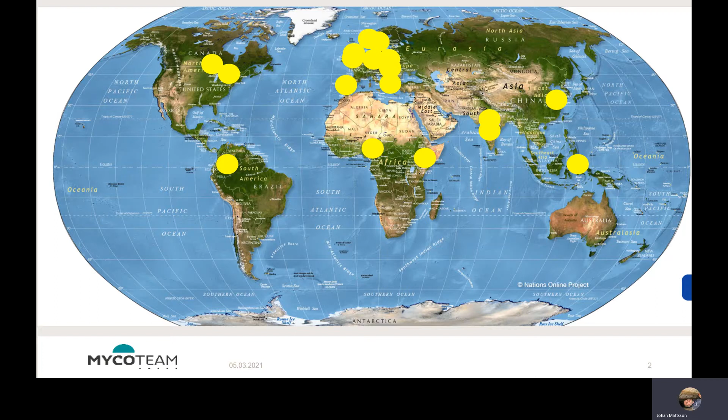This is a map of where I assume you are sitting right now and listening to this. So as you can see, it's a good distribution all around the world, and by that reason you also have very different experience of what can be the problem with biodeterioration. But still, hopefully you learn through this presentation that you also have a lot in common about these aspects, because at the general level, it's very much similar issues, no matter if you're sitting in Canada or Colombia or Philippines or in Finland. So this is typically something you have to understand at a general level in order to be able to manage it at the specific level afterwards.

I work in the company here in Oslo, and we are all the time working with biodeterioration in different aspects. We started this company in '86, so we've been working for 35 years, and we are almost 40 persons, and most of us are biologists. So we have this approach of looking into different problems with a biological view. And that can be very useful, because otherwise, if it's civil engineers or architects, they have a lot of understanding, but not about these specific issues that fungi and insects are depending on.

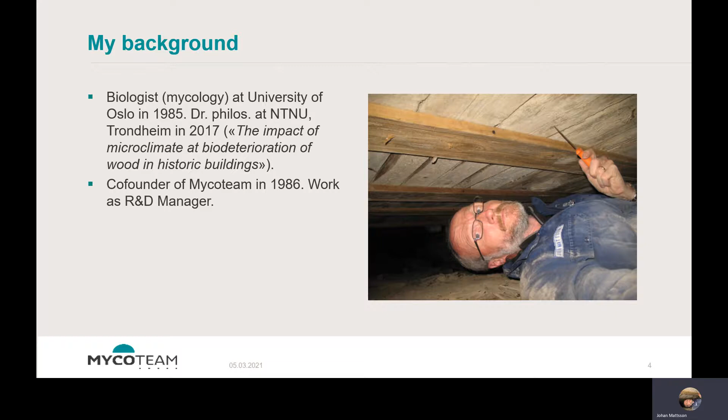And also I have a very practical approach to issues. I'm very much out in buildings looking for reasons why damages have occurred, and the solutions for how to handle a possible damage. But also, of course, it's not only old buildings. We can find biodeterioration problems in all kinds of buildings, in new concrete constructions, and of course in other constructions as well. So I've been offshore sometimes in steel constructions, looking not for fungal deterioration, but mold problems. So this is a universal problem you can find in all kinds of situations, and of course it's more interesting to work with old buildings.

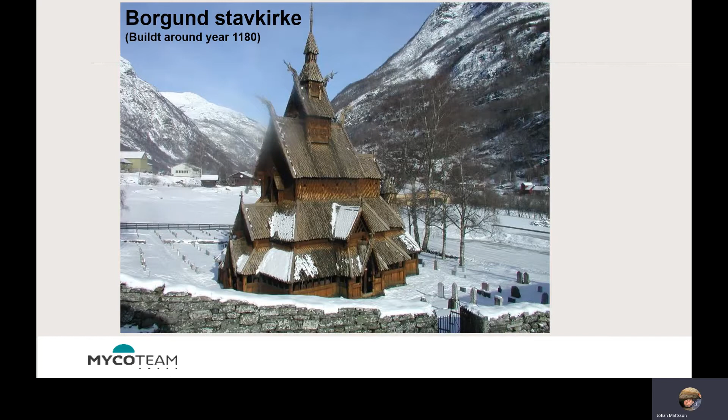At least I have a special interest in old buildings, and of course, if they're still standing there, there has been a lot of exposure and a lot of damages occurring all the time. And the building has been standing there. So reading the building, both where you find damages, where you find absence of damages, and where you find repaired materials, is a lot of important information for you to understand how this building is working, where the weak points are, and what can be done in order to avoid the damages.

But of course, the wood in the forest in nature is supposed to decay sooner or later, because it's a natural circulation of carbon and other substances. So of course it's supposed to be decayed sooner or later, but in buildings we would really like it to be later than sooner.

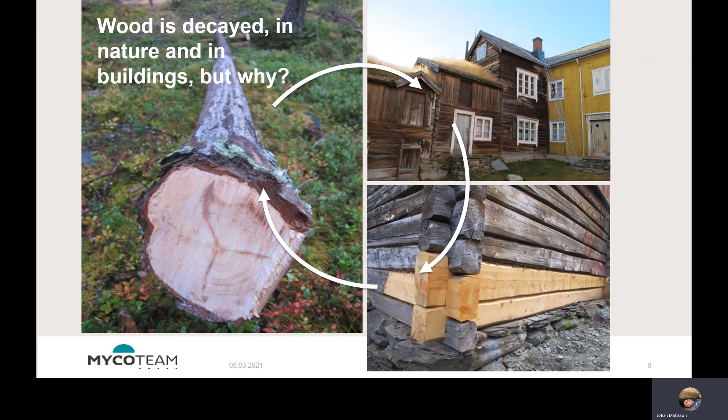So we can see and expect that this will happen. But of course the question is, how can we prolong the service life, and what can be done if we see that it's a problem with some deterioration? And to this, the main answer is knowledge. We have to understand what biodeterioration is, what the causes for biodeterioration are, and what can be done for avoiding that.

The problem is that there are a lot of different species that cause different kinds of damage. So it can be complicated if you go too much into detail. But for many insects and of course all fungi, you can generalize the issue and say that dry wood will not deteriorate. The problem occurs for pine and spruce, which are the main wooden materials in Scandinavian countries, typically when you have a moisture content above 20%. Then there's a possibility for fungal activity, and then we can have a problem.

But of course, keeping the wood dry doesn't have to be very complicated. It can be done just by good constructions, by some layers that keep the water away from the main construction, and also surface treatment, for instance, can keep the wood dry, and for that reason many of the materials are safe.

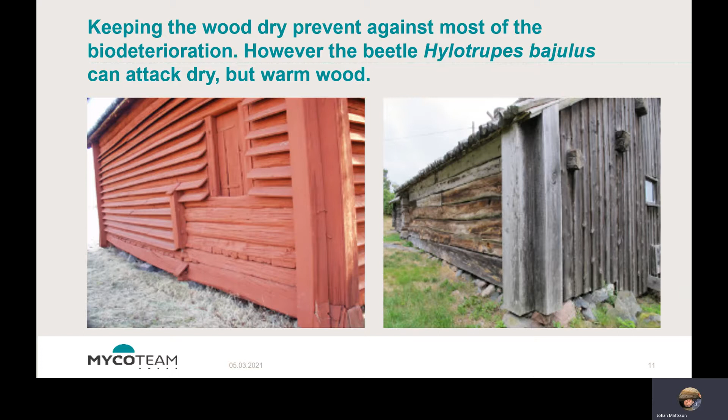But of course there are some species, like in Scandinavia we have this house longhorn beetle, Hylotrupes bajulus, that can to some extent also develop in quite dry materials, even though this is not the favorable spot for the insect. They can handle the dry conditions quite well.

But just looking out in nature, we can see the pattern of deterioration very clearly. If you see a trunk or some other materials, you can see very soon where the moisture content is more favorable and where the biological activity is occurring. So you can see that typically the sapwood is the most attractive for biological activity, in the meaning of deterioration.

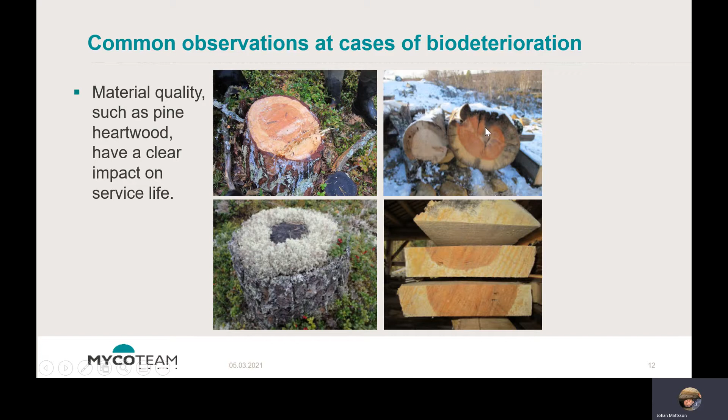You can see the same pattern in logs that have been exposed for a long period. You see that the decay is occurring in the sapwood, not in the heartwood. So we can understand that the material quality has some importance in order to avoid biodeterioration.

We have to understand the main factors causing the possibility for biodeterioration. And in order not to make it too complicated, I usually simplify it and say that we need just a few factors. There are 4 main factors that are the crucial issue in whether there's going to be any biodeterioration or not.

Of course, fungi and insects, as well as we, need some nutrition in order to survive. These specific species are really experts in digesting and deteriorating cellulose in the wood. And of course, since cellulose is a major part of the wood, the consequences can be huge if they really deteriorate that part of the wood.

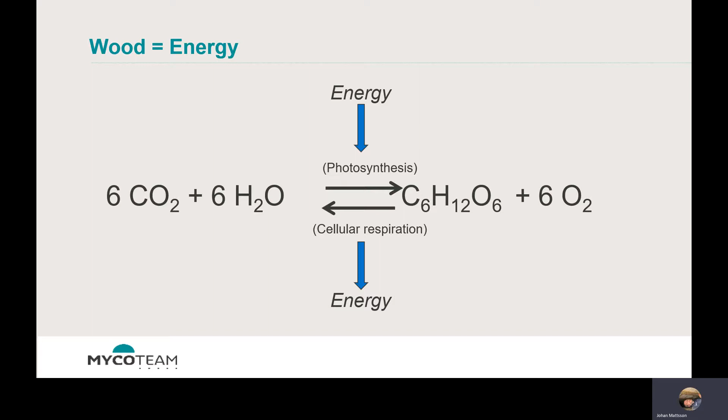with the wood. Then the biodeterioration can be caused by three different processes. One is the external enzymatic activity, and that's typically fungi. Because they don't have any intestines, they don't have any mouth, they have to dilute the enzymes out in the surrounding area, and the enzymes deteriorate the wood and give nutrition to the fungi. And in order to handle this, they need enough water in the wooden cells for this extracellular enzymatic activity.

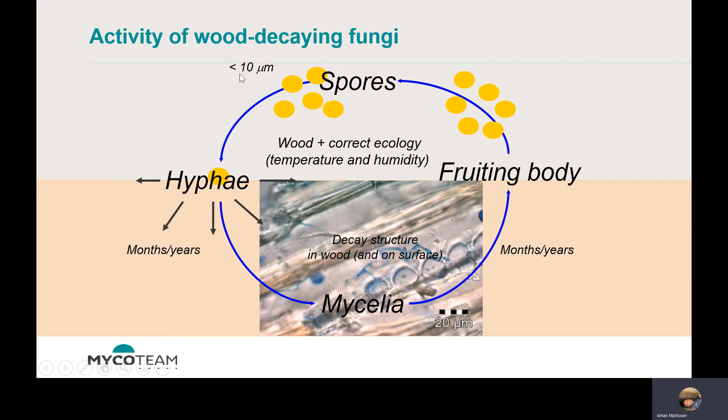So deterioration occurs in each single wooden cell. And in order to have this activity, there has to be enough water in these wooden cells. And then the fungi can eventually cause serious decay of the wood, and by that also get enough nutrition for growing and producing new fruiting bodies and spores and then spread around. So they have a life cycle that is depending on access to wood and water.

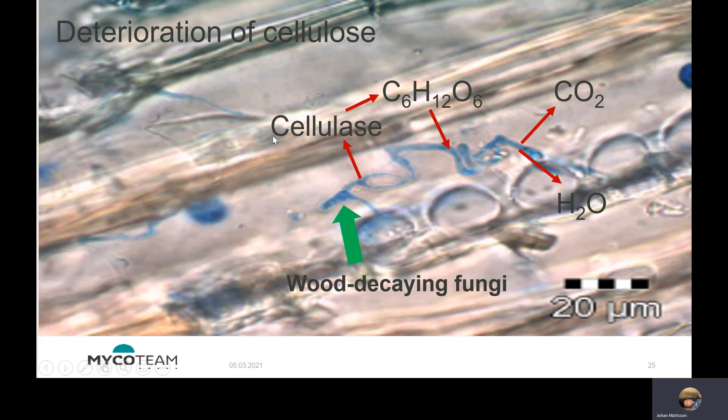And what's really happening is, here we have dyed the fungal structure blue in the microscope, but from these fungal strands, the enzymes that are breaking down the cellulose are released in this aquatic environment. And then the fungi can get the nutrition from the deterioration, and the process is releasing carbon dioxide and water. But if it's too dry in this wooden cell, the enzymes wouldn't function, and then the activity of fungi stops, and there will be no further development.

But typically the best moisture conditions are inside the wooden materials. On the surface, the wind and surrounding air are drying out the surface. So the fungi have good conditions for development inside the material, but not on the surface. So it's typically inside the material we find this decayed wood, which normally has a brown color and this cubical cracking pattern. So if you're looking for fungal attacked wood, you can't rely very much on how the surface looks. You have to look into the internal part of the wood.

And the problem with this is that this requires more or less a destructive method for investigation. But of course, if it's heavily decayed, the harm you do with your knife is not a problem because it's so much decayed from before. It might be that you see some fungal activity on the surface of the wooden materials, but that is very rare because, as I said, the surface is normally so dry, so you can't have any fungal activity there.

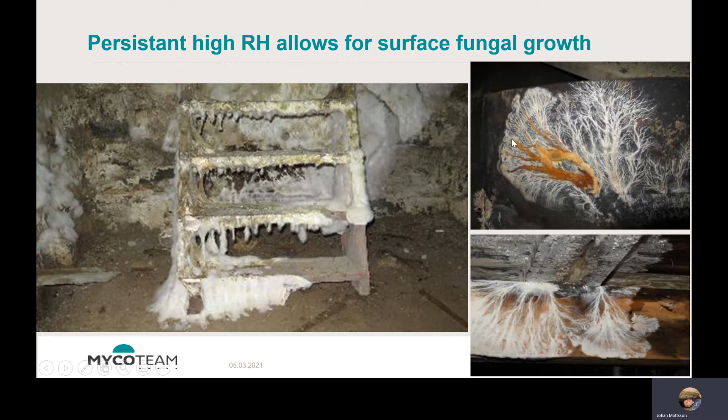But in environments where there is permanent high relative humidity, the fungi manage to grow on the surfaces and spread around much better and much faster on the surface than in the wooden cells. And that is typical for some special fungi like dry rot fungus, Serpula lacrymans, and the different Antrodia species that can manage to grow on the surface at very damp conditions.

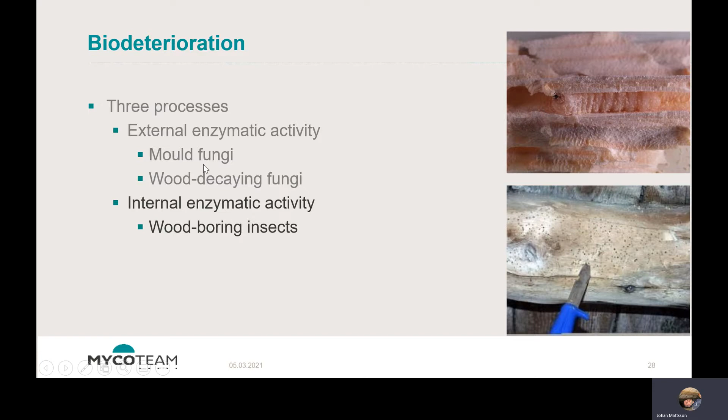But as I mentioned, there are other processes causing biodeterioration, and that is what is caused by the insects when they're eating the wooden cells. They digest it in their intestines, and then they have this internal enzymatic activity. That is caused by the insects which have the larva stage in the wood, and it's the larva that eats the wood, causing the damages, not the adult beetles, because the adult beetles just live for a few weeks and don't eat at all, so they don't do any harm to wood, but they produce new eggs that give larvae that can cause further development of damages.

So typically the insect activity is occurring inside the material, and the only sign of any activity often is the emergence flight hole you see on the surface. And then the insect has already left the wood for copulating and producing more eggs. So it's larvae inside the wood that are eating small fragments of wood, getting them into the intestines, and then it's a deterioration by both cellulase and some microorganisms, and then it's the same result: release of energy and release of carbon dioxide and water.

And the remaining part of the wood that hasn't been digested is this typical bore dust, which is the excrement from the larva. And you can see that normally the deteriorated wood is full of bore dust when the insects are eating their way into the fresh wood.

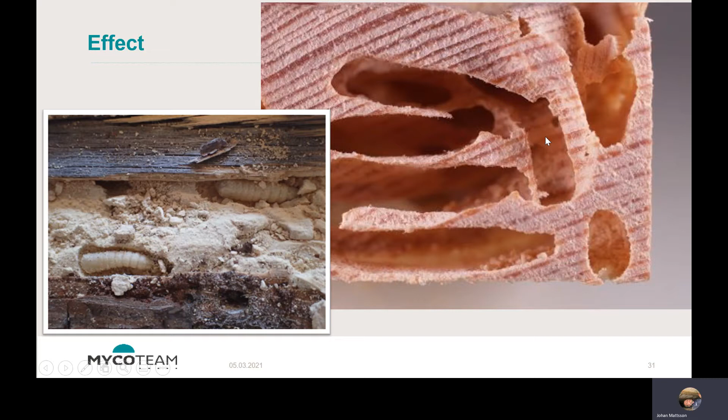And the consequence of the activity is, of course, more or less extensively deteriorated wood, and the strength has been strongly reduced. There is a third option in biodeterioration, and that is when there's no digestion at all, but some other activity causing the damage.

It might be a woodpecker making holes for a nest, or searching for food, or just making noise to scare away rivals. Or it might be ants who are using wood for a nest, and then they have to carve out the material in order to have a place to live. You can find that in nature as well as in buildings. And there are some rodents that are just using their teeth to get through wooden materials.

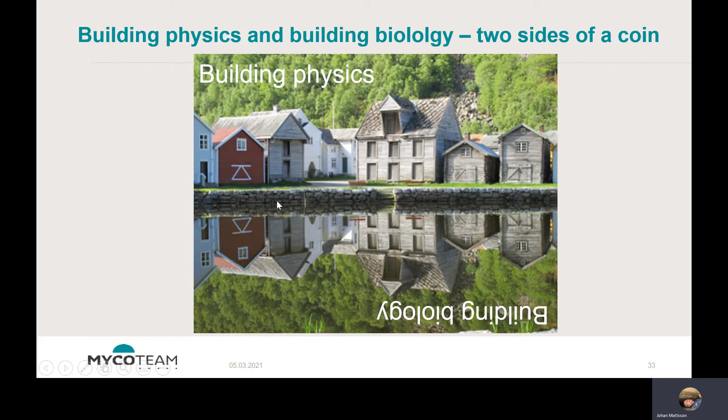You don't have to be a biologist to understand biodeterioration, but of course it's a very good advantage. The reason for biological activity is suitable building physics in the building, and on the other hand you can turn it around and say that if you have suitable building physics, you can understand what kind of biology will establish sooner or later. So these are two sides of the same coin, building physics and building biology.

And biodeterioration is a universal problem. I have been traveling around quite a lot, looking at damages in different countries. And even though there might be special species, special wooden materials, special constructions, and special climatic conditions, at the general level it's the same reasons for the biodeterioration. So it doesn't have to be very complicated to understand this. If you have a general understanding, you can apply that to a different kind of environment and still get a quite useful answer.

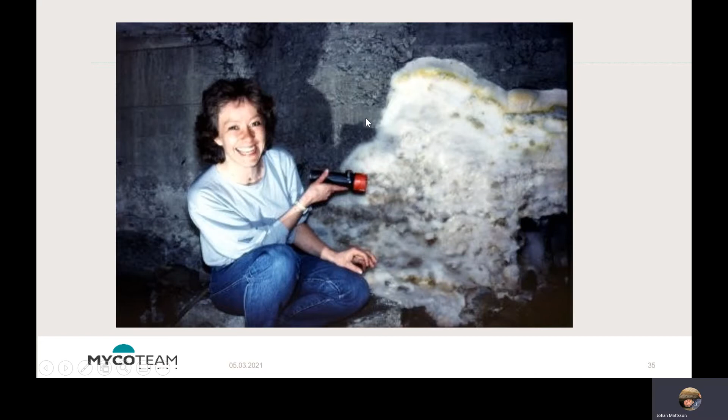But of course, if you have the interest and the fascination for biology, then it helps, even though it might be quite a tragic occasion with a lot of house dry rot fungus in the house. So interest and curiosity are a very good help for understanding the damages.

And then it doesn't matter if the house is in Norway or in Japan, as in this case in Sapporo. We have the same building physics in the crawl space, and the same kind of excess of water, temperature, cellulose, and then of course the Serpula lacrymans species, the fungus, doesn't care if it's in Norway or in Japan. It's quite happy digesting the wood anyhow.

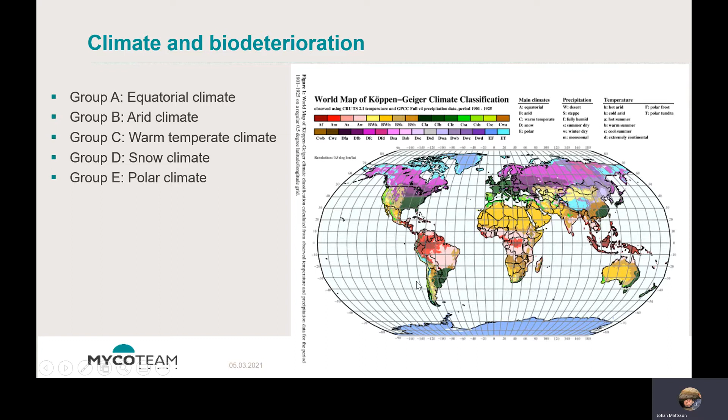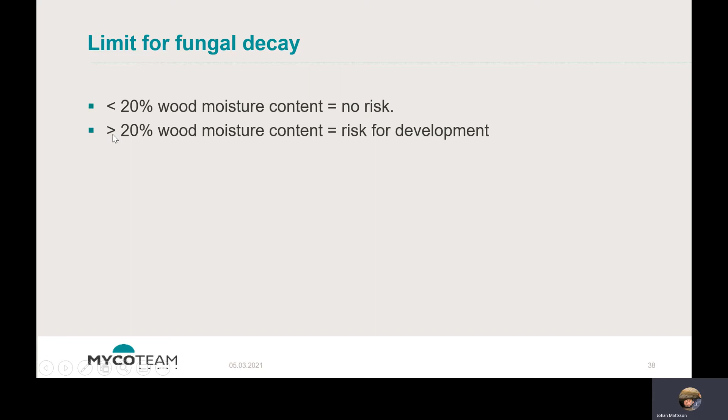So if we can take one physical and especially mental step backwards, we can understand that even though there are quite different climatic conditions all over the world, there are some factors that don't change. Typically, if it's below 20% moisture content in spruce and pine, there is no risk for fungal activity. But the higher the moisture level above this 20%, the more increasing the risk for fungal activity.

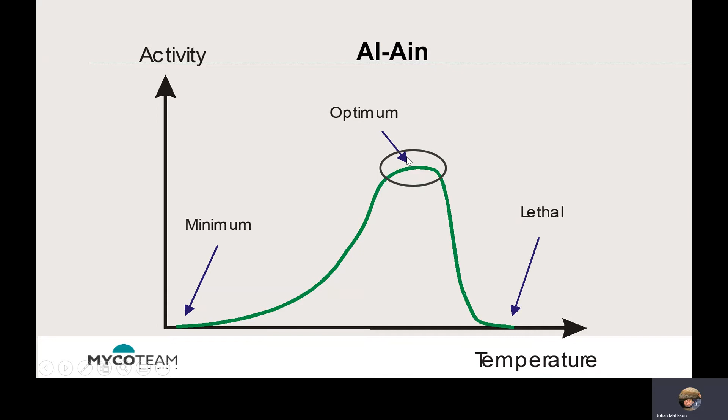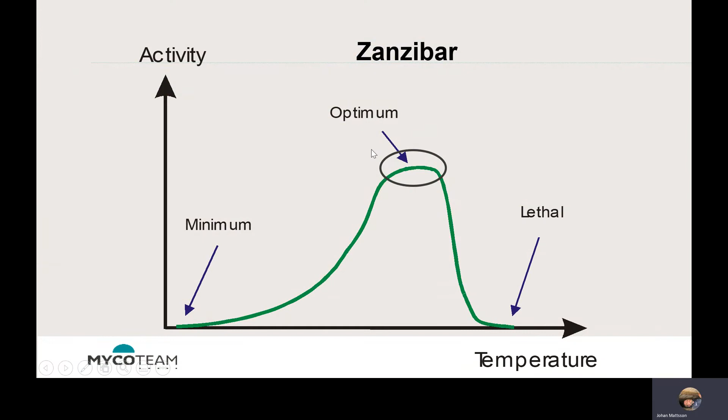But it's interesting to see that the reason the doors on both sides of the street get wet is that the water comes off the roof, splashes down on the street and splashes up again on the opposite side of the street. And of course, if you could avoid this, the wood would stay quite dry, and then there wouldn't be any problem with fungal attacks. And when I was there, we found an old postcard.

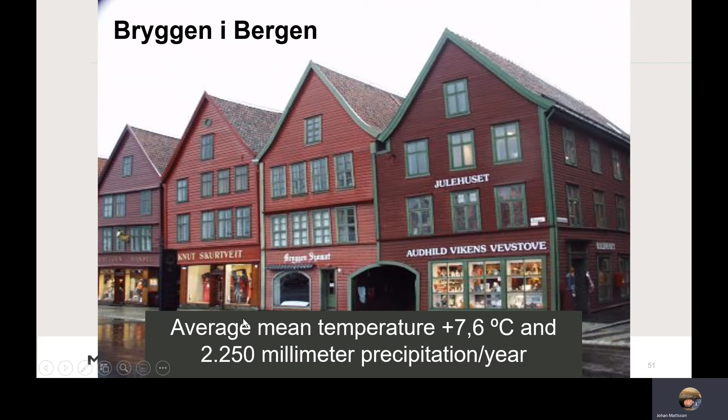If you go to Norway, we can see that it's not the same temperature. It's quite a more cold climate, but still it's a lot of rain falling down every year. Here in Bergen, this is the World Heritage Site of Bryggen in Bergen, and this is buildings from early 1700. And with that kind of moisture exposure, you can expect it to be very fragile for biofungal deterioration. So even though the temperature is not so perfect, it would be a high risk.

But the constructive elements are made for keeping the facades, the constructions so dry, so there wouldn't be any suitable conditions for fungal attack. It gets a bit wet when it's raining, but it's drying out very fast, and then it's not a problem in most of the surfaces and materials.

And of course, if some water drain pipes are destroyed, and you get a lot of water on the wall, you can have extensive damages locally where the timber is wet due to this failure. But at the same time, the other wooden materials are standing quite well because they are not exposed to this extreme water intrusion.

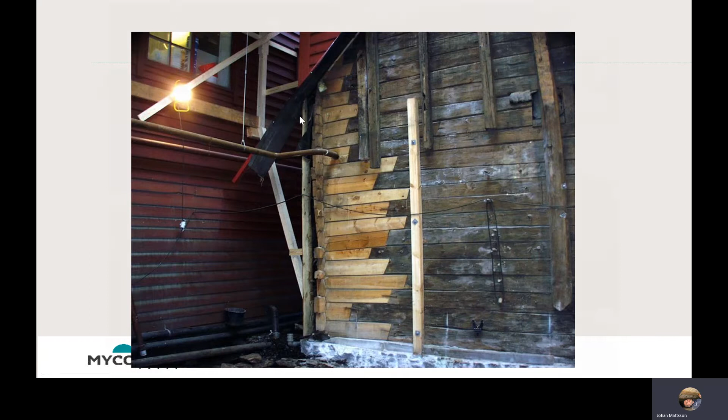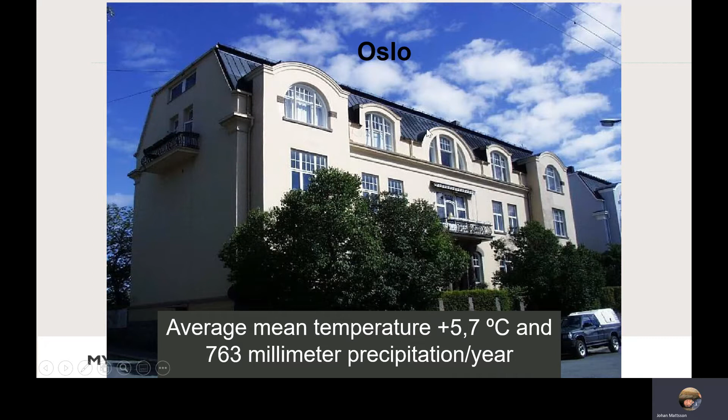In Oslo, we have a bit less precipitation every year, but also a bit colder climate. And then we can find typically the damages are occurring where we have leakage into constructions. And as you remember this map, obviously we have a lot of biodeterioration in Oslo as well, even though it's a cold climate and not so much precipitation.

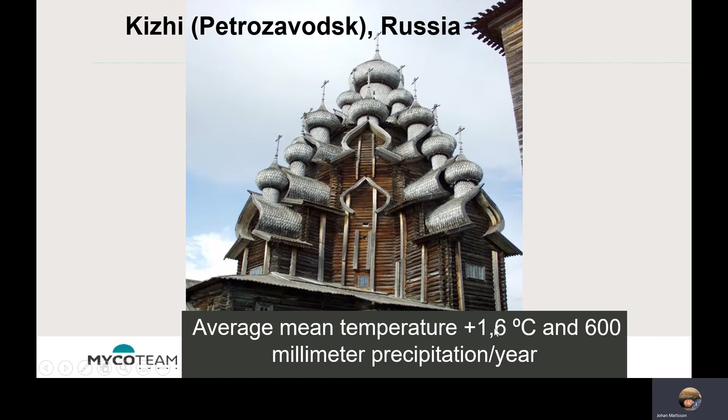Another example is in Russia, at Kizhi. And here it's even colder. The average mean temperature is just above 0 degrees Celsius, and it's not so much rain either. So then you can expect it to be quite unfavorable for fungi to grow there. But still, there are some materials that are exposed to temperature, exposed to water, and then of course it can start to deteriorate.

But then again, it's just part of the construction that gets wet and will get the deterioration. So it's not necessarily so extensive damages, but as long as you get water on the surfaces, it's a risk if the water gets into the logs and has a long, slow drying out process.

And typically there, the church had originally a timber construction, and then they installed a cladding, and the cladding was protecting the timber structure. So the fungal attack that had started the first time was halted by the cladding. But when the cladding was removed, the deterioration could continue because then it got more water on the timber construction again.

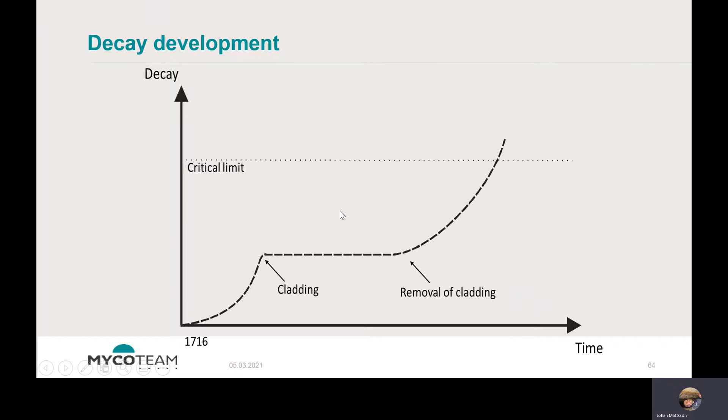The exposed timber up in the air is drying out thanks to the wind, but the lower part of the buildings might have a problem due to the snow and rain that is on the surface and gathered together in local areas.

And then of course you have a problem with biodeterioration, even though the climate in general is very harsh for fungi. The most extreme illustration of this is from Svalbard, Spitsbergen, which is about the most extreme you can think about. It's an average temperature of -6 degrees Celsius, and it's a really low amount of precipitation. So this is more or less a polar desert.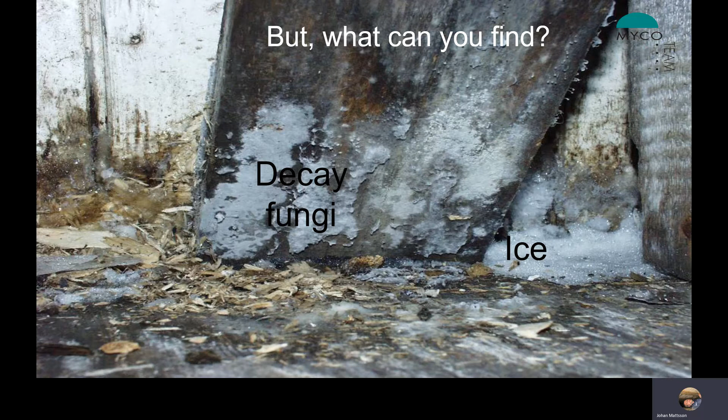There are some periods when the temperature is not so low anyhow, so the fungi can grow. This fungus is typically the one we find very much at Svalbard. It's Leucogyrophana mollis, so it typically has quite favorable conditions, even though it's cold in a general sense.

But if you start mapping the temperature in this hunting cabin, with the air temperature at the time of 1.4 degrees Celsius, you can see that different parts of the wall had a significantly higher temperature due to the sun radiation. So it's not correct to say that this hunting cabin had a temperature of 1.4 degrees Celsius. It depends on where you're looking for the temperature.

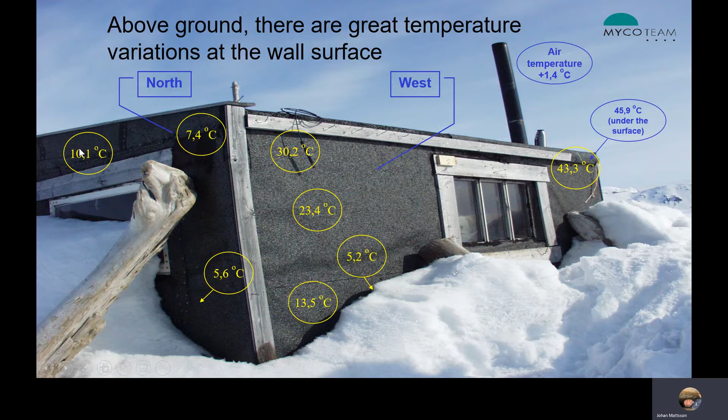And as a matter of fact, in that area, it was so warm that it was too warm for any fungal activity, because it's a dark surface and the sun radiation gets the temperature very high. And it's fascinating to see that at Svalbard, we measured higher temperature than the average temperature at Zanzibar.

So you can't only rely on looking at the map or a general impression of what the situation is. You have to measure it and examine it in order to really be sure what is the correct situation. So in this roof board, I can go back, this one, you can see that inside this material it's more or less a tropical microclimate. As long as it gets wet, it's fantastic for fungi to grow there.

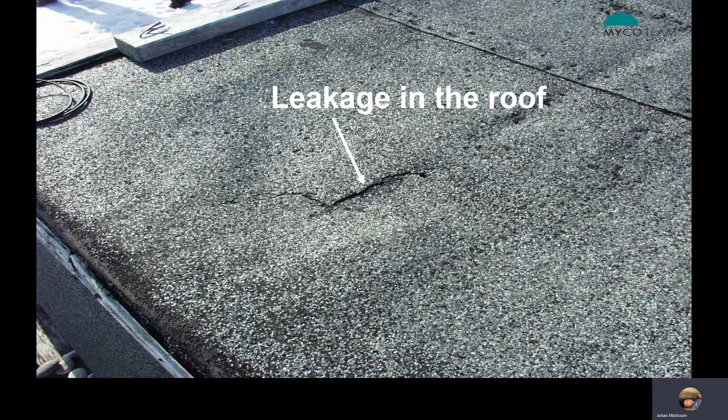And this fungus we found here is Gloeophyllum sepiarium. It likes warm, sun-exposed constructions in Scandinavian countries. So this really shows that you have to look into the microclimate in order to understand the risk for biodeterioration. And even though there's very little precipitation, if there's a leakage somewhere, a lot of water can get into one spot, and then you can have extensive deterioration in those materials.

But of course, people there are not so concerned about decay fungi, because they are more afraid of other organisms that might be more dangerous in general.

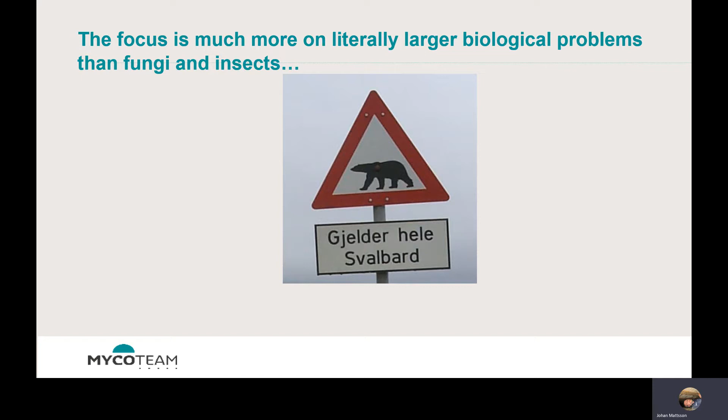At Zanzibar, the timber is very resistant, but the climate might also be very harsh, very humid, damp and warm. So we can see that many of those damages I've seen in Bergen, in Røros, Svalbard, Russia, Zanzibar, and other places happen within 50 to 100 years if it's outdoor exposed materials, because the microclimate might be much more similar than you first expect it to be.

But then, of course, some damages don't really depend on the climate. If you have a leakage in the roof, if you have extensive water intrusion due to some constructive error, then it will be a problem no matter what kind of climate you have.

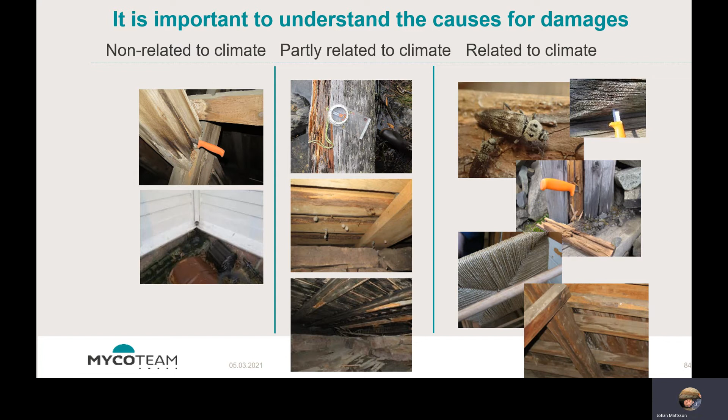And sometimes you can see the construction has such stable conditions that the climate doesn't really matter so much, while other damages really depend on the climate, on the temperature for insects, for instance. There is no insect problem at Svalbard because it's not warm enough for insects to survive there, but the fungi manage.

So we have to understand what are the different reasons for deterioration. And climate change is a very big issue in many countries. Of course, it really should be. But when people started using modeling methods to predict what will be the future decay problem on outdoor exposed wood, then I have to say that this is a completely wrong way to analyze things, because it's not correct.

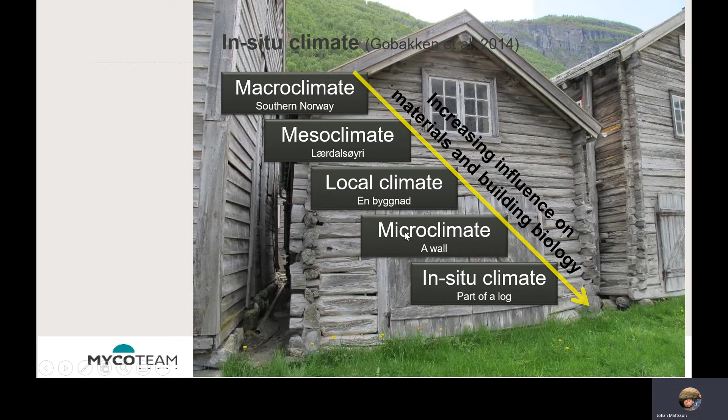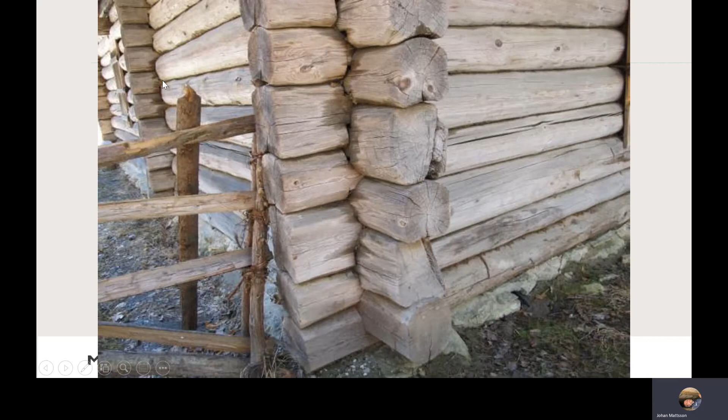You can see this is from Estonia, a museum building that was moved there 30 years ago. And you can see in the springtime it's a quite dry log wall. But if you look in detail, you can see that some areas are a bit wet due to rain and dripping from the roof. And we can go even closer. We can see that this is the area which is really wet.

And the question is, how fast does it dry out again? If it's wet for weeks, months, then there's a risk of deterioration of the wood. So even though the building might look quite dry, there can be local areas that are critical for biodeterioration.

Then, of course, it's not only fungi. It might be mold. It might be other plants that grow and cause discoloration, and there might be different reasons why there can be decay of wood materials, even though they're not necessarily eating it. So different reasons can cause different kinds of damage, but the main problem is biodeterioration. And that is something that's predictable.

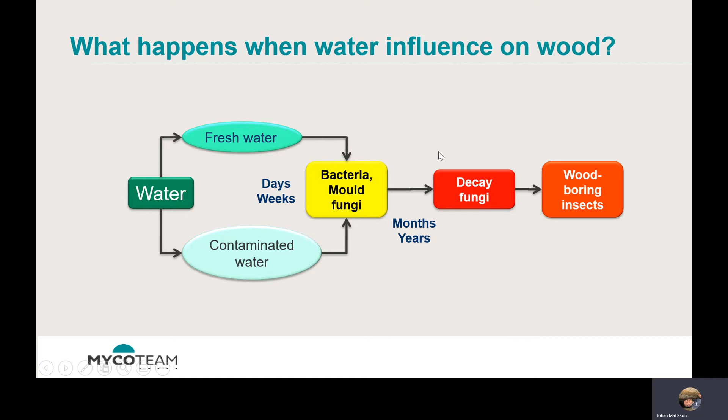You know, if you have wet timber, there will be some mold within weeks, some fungal attacks within months or years, and also wood-boring insects within years. So this is very predictable, and that's a very good advantage when we try to avoid problems in buildings. You saw this earlier. On surfaces there's not very much damage to find, but inside the material we have much more extensive damage developing.

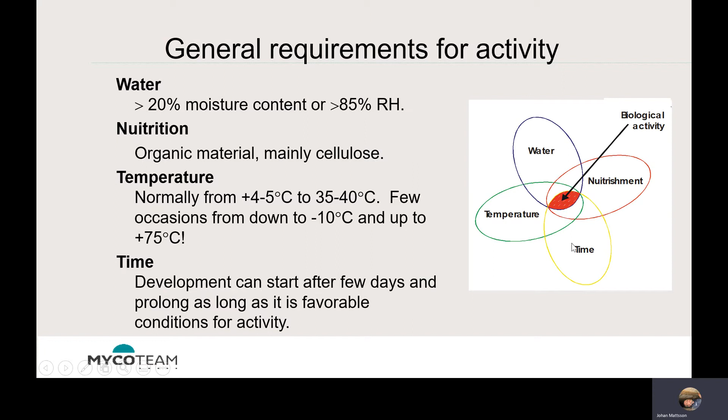And the reason is, just to repeat these four factors: if it's wet wood at a suitable temperature, it's just a matter of time before it has some kind of biodeterioration. So this is the figure you have to remember. And if you understand this simplified version of the conditions, then you can solve most of the problems in your own country.

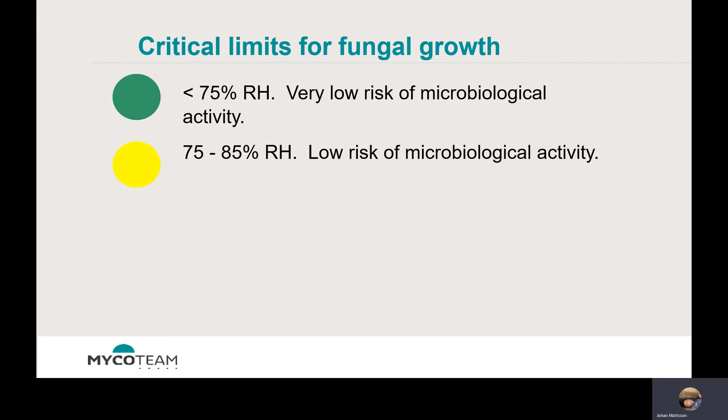If we're talking about mold, then it can occur on many different surfaces, and it can grow quite fast, as I said, within weeks. There are a lot of different species, but most of them require above 85% relative humidity in order to grow. And the higher the humidity is, the better the conditions for the fungi. So if it's completely wet, you can find mold damage perhaps within weeks. So the critical issue is to keep the wood dry.

So the gradient is very small, just within a few millimeters, and that is a critical thing to understand when you are looking for moisture problems and measuring the room air relative humidity, because it's very easy to measure at the wrong spot and then you get the wrong answer.

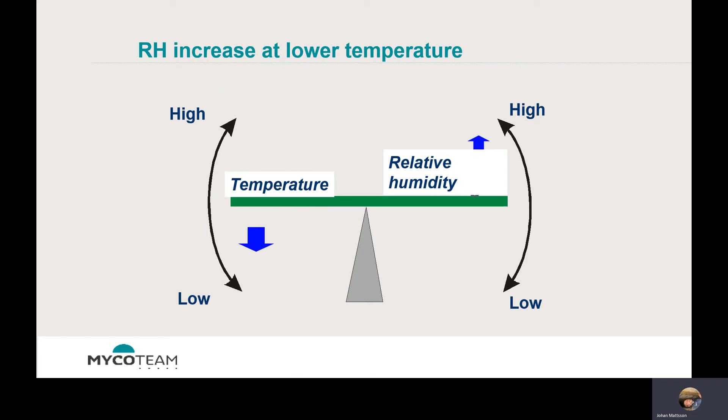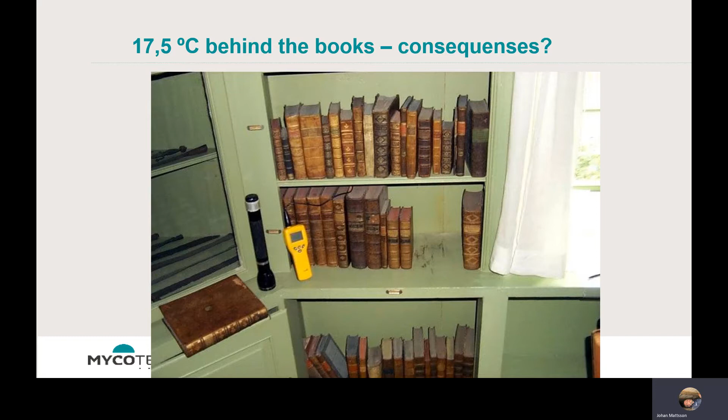The practical issue of that is that you can see in this case a museum library with quite poor ventilation. In the room air, it was 75% relative humidity that summer with 20 degrees Celsius. And on a north-faced wall, behind this bookshelf, we measured 2.5 degrees Celsius lower temperature. And what would be the consequences of that? If you remember, I said that if you change temperature 5 degrees Celsius, the relative humidity would change 20%. In this case, we changed it from 20 to 17.5 degrees behind the books. Then the relative humidity would rise 10%, up to 85%.

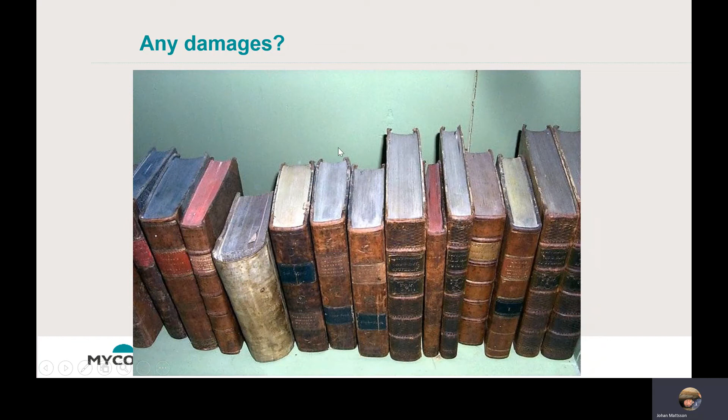Then the question is, is that a problem? Well, you can look on the surface area to a room, and it's not a problem at all. But behind the books, where it's more stable, a bit more damp conditions, you can see, not necessarily very easily, but if you look more into detail on those books, you can see that there were some visible mold damages on the surfaces.

So a good advice to look for mold damages is to use a parallel light beam on the surface. Then you get a relief of the mold that gives a very clear vision of the established damage, like here. So be active with a flashlight or use flash on the camera when you take pictures in some different angles, and then you might see the damages very clearly, even though it's not so visible for the naked eye.

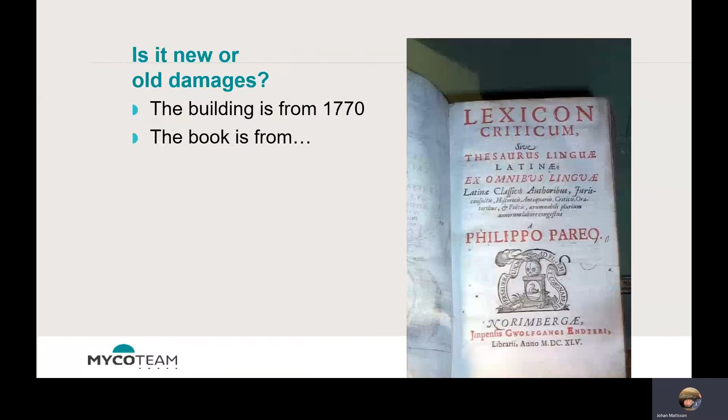Then, of course, if you have books with mold damages in a building, you have to start asking, is this a new or an old damage? The building was from 1770, and the book, as you can see down here, is from 1645. So in this case, the book was older than the building. So potentially the mold damage could have been brought into the building. But if you go back, you can see that this is very fresh, new grown mold. So at least I can see that. So then you can understand this is something that had happened that summer.

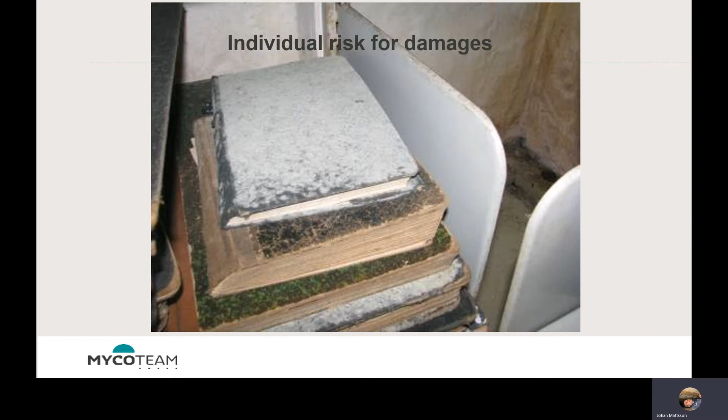But as always with timber, with other materials, and people as well, one person can get a cold and another can stay healthy. You have to understand that different, more or less similar materials can have very different reactions to an exposure for mold, for instance. You can see this book on the top is heavily infested by mold, and the next one is not at all, but then again, one book is heavily infested with mold. So if you're looking for damages, you have to make a representative selection of surfaces you're looking at in order to find if it's a problem or not. And remember this.

Sometimes it can be very strange damages, like this case. Here you can see that this wooden spoon in an unheated museum building in Norway had extensive mold growth on one part of the spoon, but not on the other part. And at the same time, you can see that the floor, the wooden table, didn't have any mold growth at all either. So of course the temperature, the moisture, and the time exposure is the same. So the only different thing is the accessible nutrition.

And as you can see here, the wood is not enough for the mold growth, but this spoon has never been washed properly after it was used last time. So this part has been used in some food, porridge or something like that. So the remains of the old food substances is enough for the mold growth to occur. So in one way, it's not necessary to change the temperature, the relative humidity, or that kind of physical aspects, but in order to remove the mold, you have to wash the spoon.

But of course, then you remove some of the old food nutrition substances that could be interesting for scientists in the future. So don't uncritically remove all old dust, old surface treatment or whatever on surfaces, because they might be a source for future information.

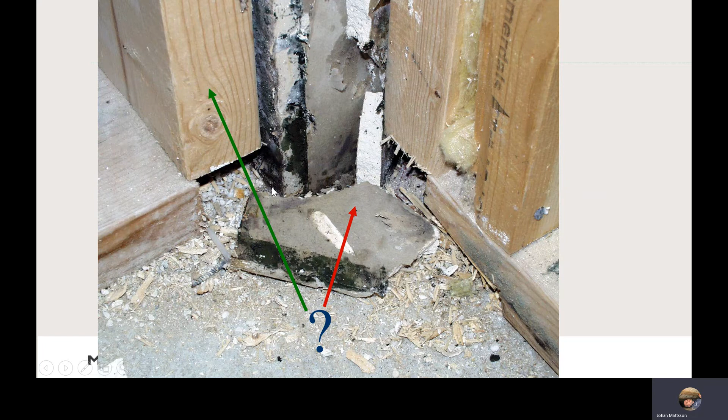So using ordinary traditional spruce materials has proven to be okay, but these modern cheap wooden particle boards are completely hopeless in that exposure. And we see those differences between different materials in modern buildings and water damages. You can see the wood itself, the spruce, has no sign of mold growth at all, but these modern gypsum boards, plasterboard, have extensive mold growth on the paper lining on the surface. So we have to understand that material quality has a very large impact on the risk for biodeterioration.

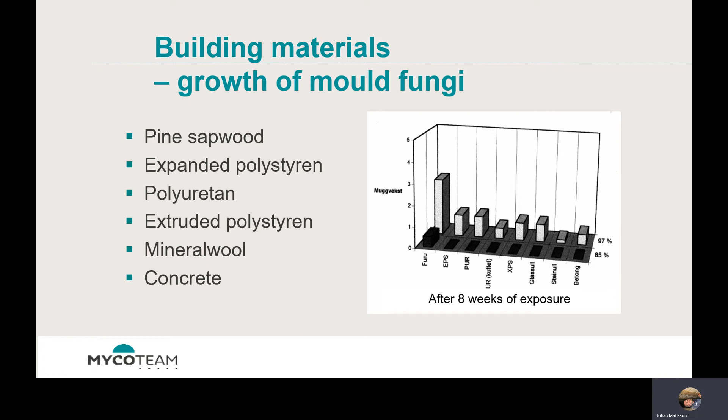And well, this is modern materials, but we did a test of growing mold on modern insulation materials. And you can see at 85% relative humidity, there wasn't any growth at all, except for the control material, pine. But if we raise the relative humidity to 97%, we got, as a matter of fact, mold growth on concrete, on rock wool, on glass fiber wool, and different extruded polystyrene and polyurethane foam. So mold can grow on any surface if it's getting wet enough for long enough time.

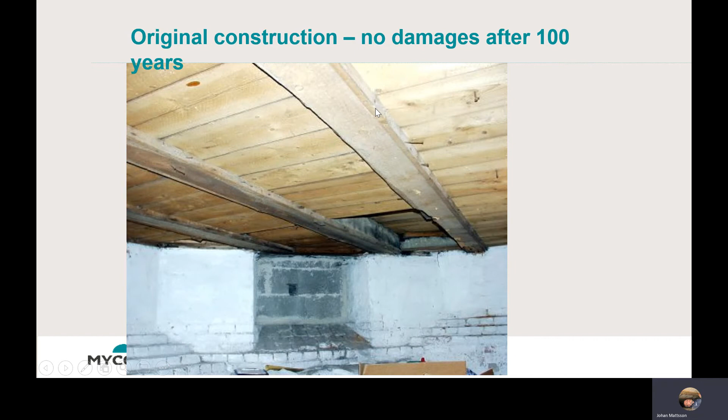And typically, you can see that this damp basement has worked quite well for 100 years, and then by a fire regulation, the floor was secured by gypsum board in order to get fireproofing. But then in this exposure, within 1 year, the gypsum board was heavily infested by mold growth.

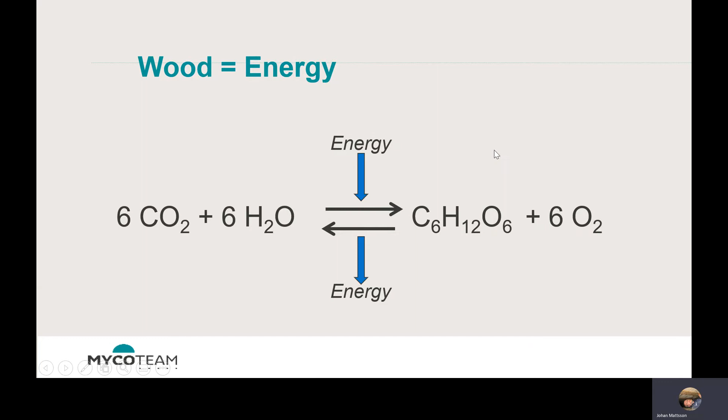So we have to understand: is there possibility for the different organisms to deteriorate cellulose? They will do that. And we have to understand what is the risk for that happening in different material quality, different exposure, different conditions. Because if the fungi get the possibility to deteriorate cellulose and hemicellulose, there is very little remaining material in the wood. Only the brownish lignin remains, and then the kind of decay is called brown rot decay. It's caused by very many different kinds of species.

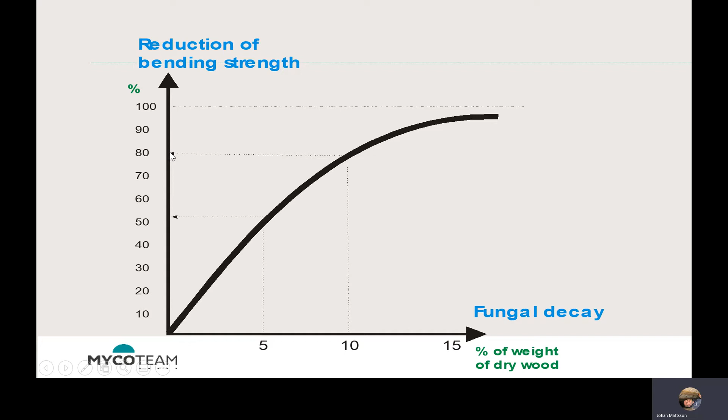But then the challenge is to find where the damage is, because we can't find it on the surface. We have to go into detail and see where the risk is for any activity, both by normal fungi and more rare fungi, because this is the ruling reason for the damages.

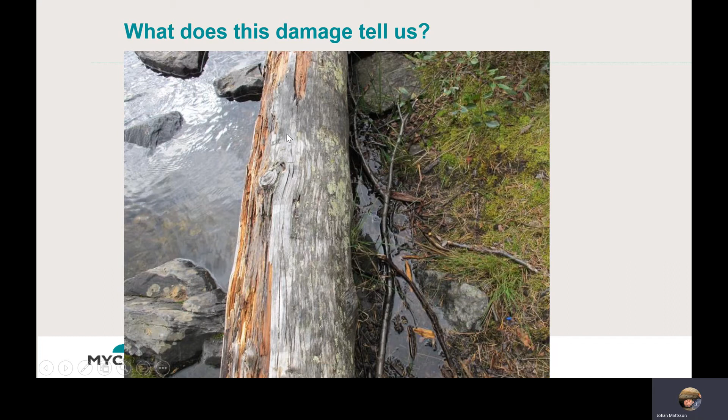So you just have to understand that temperature is typically one important factor, and this can be seen very clearly where you have a log with outdoor exposure. The log is completely wet, with a moisture content far above the critical limit. And you can see one part of the log is without any damages or fungal decay, while the other part of the log is heavily decayed by different wood decaying fungi.

And you can see that the reason for that is that you have sun radiation on this part. So in that climate at Röros, the limiting factor for many fungal activity problems is the sun, the temperature. In the shadow part it's so cold that the fungi struggle with growth, but on the sun-exposed part there are very favorable conditions regarding nutrition, moisture and temperature, and time for developing these damages. This had been happening in about 20 years.

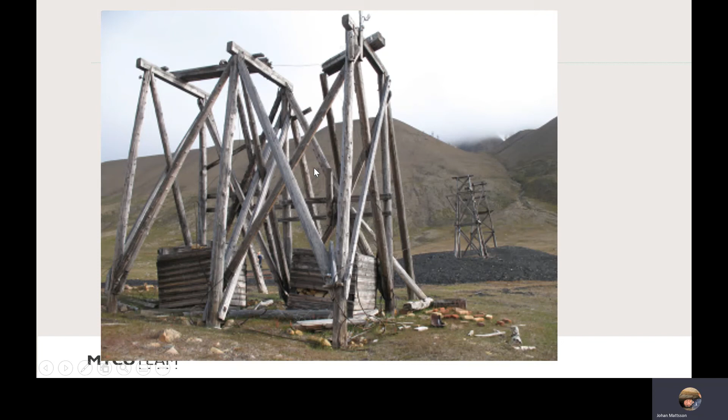So we have to see where the suitable situation for fungal attacks is, and it's typically not on the surface, even though some elements, these fruiting bodies, are growing outside on the surface in order to spread new spores. The fungal activity occurs in the wood materials. We looked at this at Svalbard and other places, and we can see typically the same pattern occurring everywhere. The internal part is decaying where it's wet for long enough time.

At Svalbard, you have permafrost in the ground, and you have this thaw zone of normally 20-30 centimeters, and then you have the air conditions. The accessible water comes from the permafrost and up into the air, and then it dries out due to the low amount of rain and wind. And the temperature, if there's sun radiation, might be high on the air part of the wood and decreasing down to the thaw zone, because at the permafrost there are never any plus degrees at all.

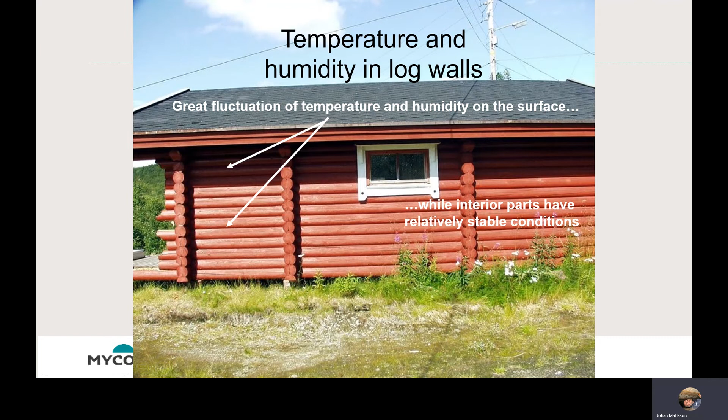And this is also found in buildings on the mainland of Norway. Where it's in shadow, it's not so favorable because it's not getting wet from rain, and it's not so warm from the sun either. So there can be big variation on the same wall, whether it's high or low risk. And you can also see here that the surface is typically too warm due to the sun radiation, and also too dry due to the sun radiation and the wind.

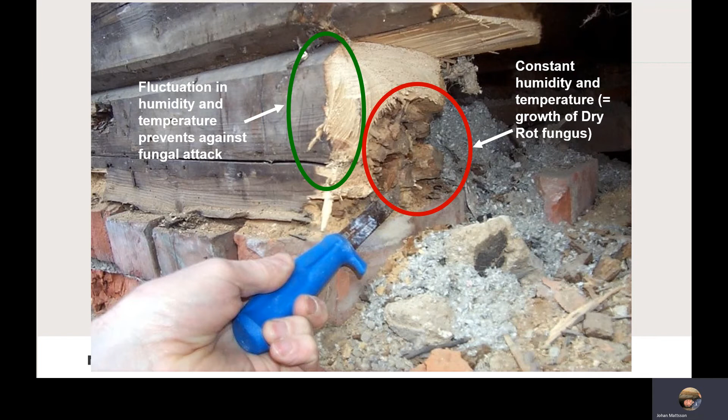But just a few centimeters into the wood, there are more stable conditions with temperature and humidity. And then we can see typically an internal decay pattern with an unharmed surface, while the heartwood of this material, because this is pine wood, is without any damages. The pattern of decay always tells us what the situation is regarding humidity and temperature, and by that we can understand why the damages are developing in that pattern.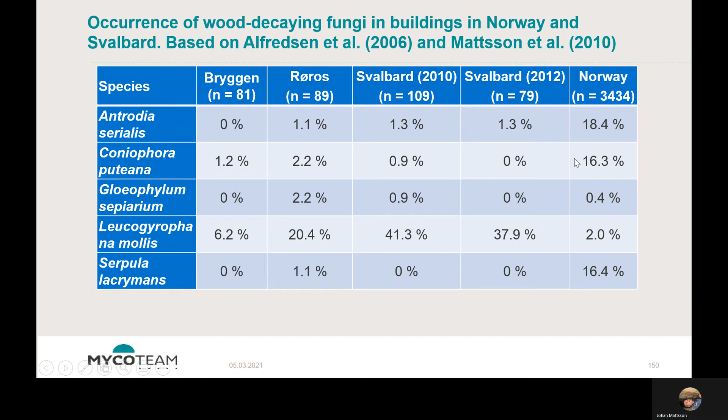This is not anything you need to remember, but it can be interesting to know that in some exposures, as I mentioned, Leucogyrophana mollis is very common on Svalbard, while other fungi are really struggling to develop there. But at the same time, on mainland Norway, you can see that other species are most common in buildings. So you can learn a lot from the fungi as well, but building physics is the most important thing.

We can also see that where we have found decay problems is typically in floors, mainly down to basements and the ground, the crawl spaces, and of course external walls which get wet from precipitation. And if roofs are leaking, then we also find damages. So it's very predictable why the damages occur in those places, because the building physics there will be the most optimal.

So just by reading the damage as a book, we can really understand what is the reason for what's happening, what is the result, and what is the solution to avoid this. We can understand almost any kind of damage, even though we have to make an adaptation to the specific case, like here in Svalbard. You understand that there can be very different microclimatic zones for possible growth of fungi, for instance.

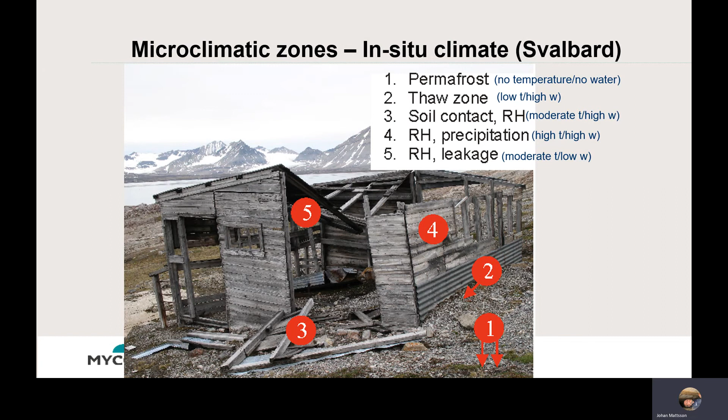But this can be applied to any kind of building, as a matter of fact, from the southern wall to the north facade wall, from the roof to the crawl space. So we have to understand that it is like a big jigsaw puzzle. A lot of different parts of the building will have different conditions. So we have to understand what is the risk, what is the real damage, and what is the solution.

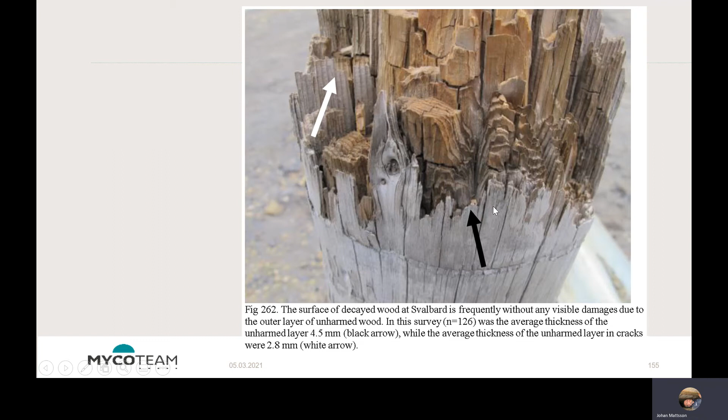And as I mentioned, this border between unharmed wood and harmed wood can be very small; just a few millimeters can make the difference between an unproblematic situation and extensive damages. And you can see the pattern that microclimate is extremely important. Within this section of a log wall, the right part is from the outside of the wall. And you can see in this crack, water has penetrated through wind and precipitation.

You can see that the less dense spring early wood is more attacked and decayed than the late wood, which has more dense wooden cells. So microclimate is the most essential part for understanding the damage development. And this could be applied to insects as well, not only fungi. They have the same kind of basic requirements, and that's the reason why we can have different activity, from termites at Zanzibar and other places to carpenter ants or other insects.

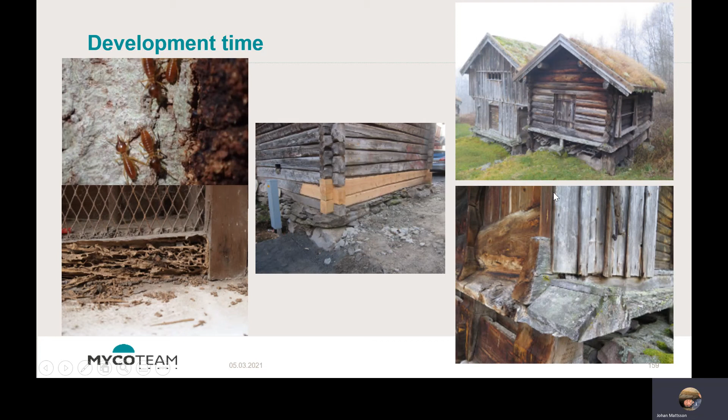So we have to understand what is the condition and how fast it can grow, because normally in a cold climate, in a building with good ventilation, it doesn't grow very fast. There might be exceptionally fast growth in a few cases, but this picture to the right is not what we see every time there's a dry rot fungus attack in buildings. So it's easy to get scared if you just read what the worst case scenario would be, but normally it's not so bad, and all damages are handleable in one way or another.

But we have to see the whole picture, because if you see holes on the surface, it's easy to think, oh, these are emergence flight holes from wood-boring insects. Maybe it's just these few holes, so it's not a big problem. But if we check this out better, we can see that it's a brown rot decay, at least in the internal part of the log. And then we can also understand that these emergence flight holes come from insects that live in fungal attacked wood. So this kind of damage will, more or less, not be able to develop further than the fungal attacked wood already had.

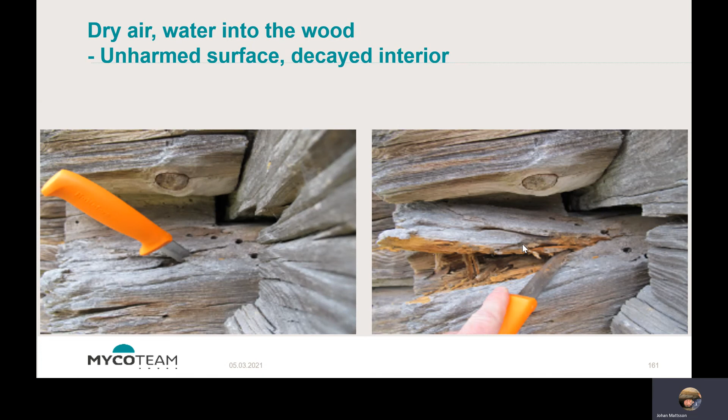But if you see something that looks strange or different, it very much can be solved by common sense, curiosity, and perhaps asking for help. Some experts could just look at the picture and say something about the risk for further development or consequences for measures. So you have to go in and look with open eyes and see what is possible to see.

This log wall, you can see that most of the damage is in the lower part and also at the upper part, not so much at the middle part of the log. And of course, understanding that this roof has been repaired several times, the water is just falling down and splashing up again. It's not surprising that these materials have been attacked by both fungi and insects, and partly up here also.

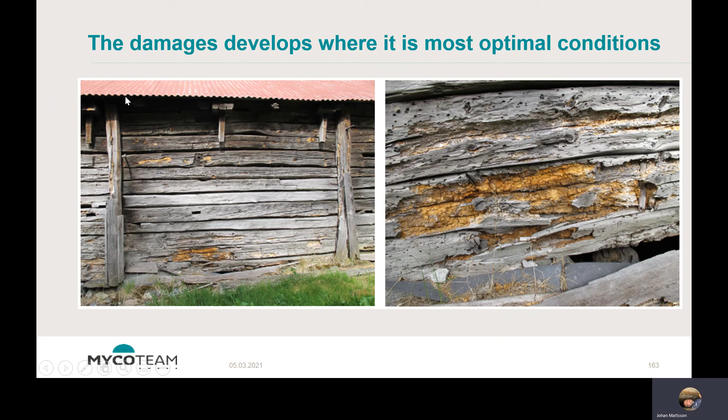So we can see the pattern, and then we can understand the possibility to avoid this kind of water exposure, if in the future we can make sure that the water from the roof is not just falling down and splashing up on the wall. Some drainage pipes, or whatever is possible to do, should at least be an option to find out in order to remove one of these four factors. If you take away one of them, there will be no further activity.

So then we also have a problem with all the established truths that people are talking about. They say that this beetle, the house longhorn beetle, lives in dry wood. It's partly correct, but if you look into the facts, in optimal conditions they would really like to have high relative humidity, quite nice moisture content, and a high temperature. So we see they can survive in dry conditions, but that is not the first choice, and it will go very slowly.

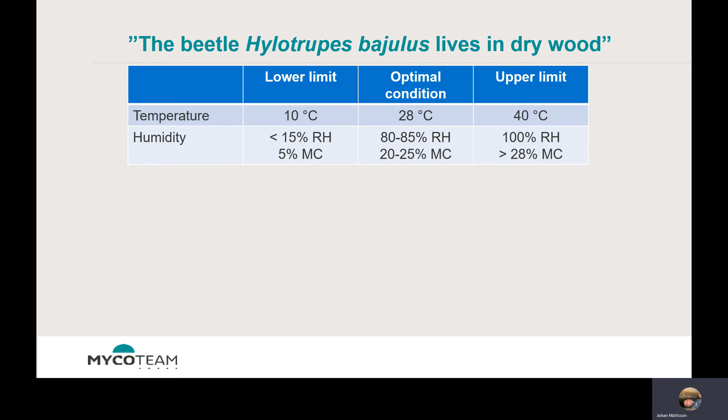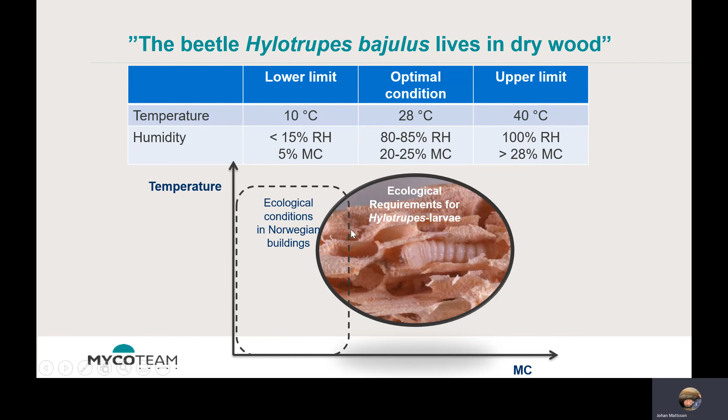And you can also see if it's getting too warm, even though it might be damp conditions, the insects will eventually die due to the too high temperature. So the ecological conditions in Norwegian buildings are not optimal for all insects, but it might be a possibility for part of the activity at least to use these temperature layers.

But again, when people say they develop best in sun-exposed materials, and I say it myself also often, we have to remember that sun-exposed is not a specific description. In this case, this part of the log, which had a lot of rain and a lot of sun exposure, I expected to have a lot of house longhorn beetle damage, while here down in the shadow area, with little direct rain and little sun exposure, I expected very little insect activity. But as a matter of fact, these shadow areas were most attacked compared with the sun-exposed, which were more or less without any damage.

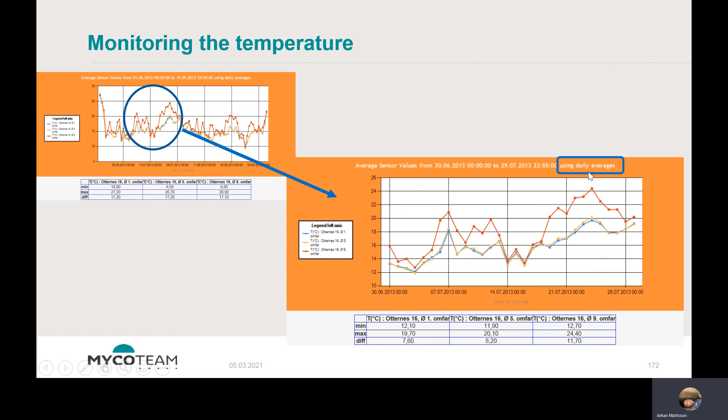And if you have some measurements, if you see some diagrams of temperature logging or something, it's so important to understand what we can read out of this information. This is one month of logging in this sun-exposed log wall. And it looks quite nice. The red line is up in the sun, and it looks like a favorable temperature for insects. So that would be very suitable for them. But then we have to remember that this is based on daily averages.

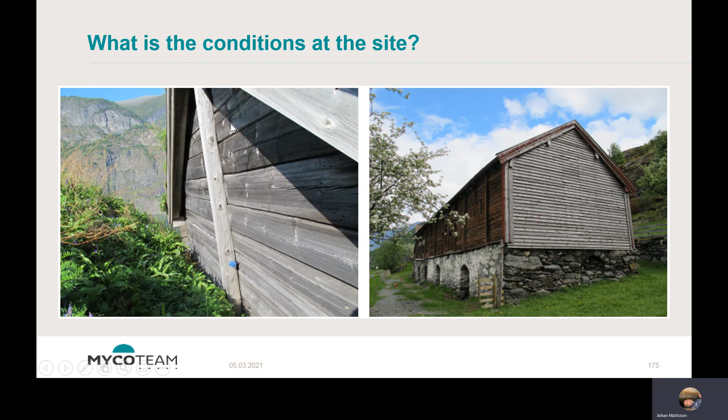And that explains why we don't have that kind of insect damage there compared with the expectation. And we see the same in other buildings. When we start monitoring, we can see that due to this sun radiation, we get a high reading almost every day or several times a day. And that will cause such dry and warm conditions that the insects will struggle to survive.

Here you have this. You've seen that one. If you remember, it was the sun radiation that caused that possibility for the fungi to grow there. And again, we can monitor and see that the sun radiation at Røros is the limiting factor. So if you have exposure where it can rise up to 20, 25 degrees Celsius, that is much better than those materials that are exposed to 10, 15 degrees Celsius. So we have to analyze what is the optimal condition for the fungi, and vice versa, what are the optimal conditions for preserving the wood.

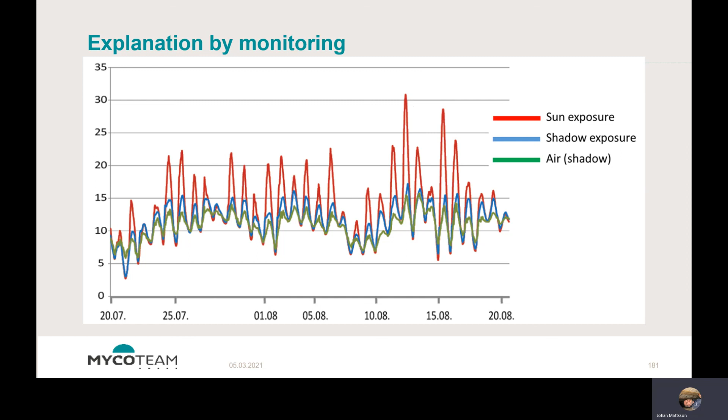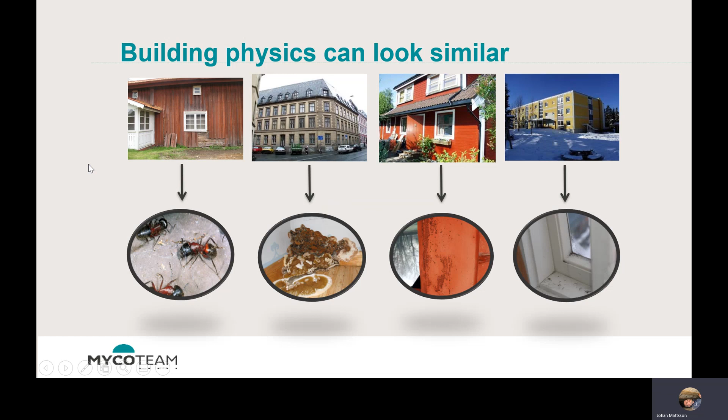And by doing that, we can make sure that we have as long a service life as possible for the materials, even though we don't initially perhaps see the differences between apparently similar conditions, because a wooden building and a brick building would have very different moisture and temperature conditions. So we have to understand that even though they might have the same conditions, we can find completely different damages because the building physics are very different.

So I always try to explain that if you look into a building and would like to see where the risk for damage is, what the damage is, what the cause is, and what the solutions for handling it are, we have to take a mental and a physical step backwards to just get an overview of the building first. And when we have that, we see that this part is quite nice, and the main problem is down by the street here, where we have some water splashing up on the lower part of the wall, and we have some decay problems.

When you have this general understanding, then we can take two mental and physical steps towards the building and see if the first impression is correct, or if there are some extra factors we have to take into account in order to understand the complete picture.

So I hope this was a good comprehensive introduction about the importance of microclimate.